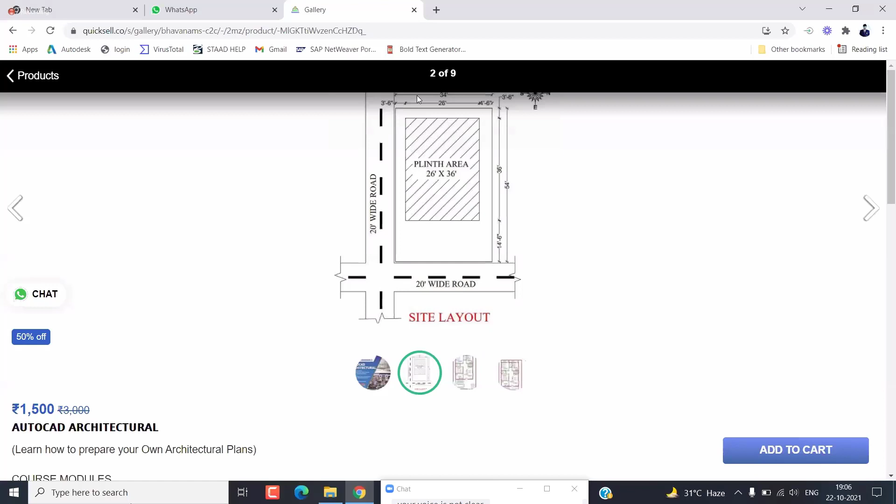And if you go here, this is how we can draw the master bedroom, and children's bedroom, kitchen, and where we need to place the living room. These are all things you need to learn as per Vastu.

So AutoCAD is not just a tool. If you know the concept clearly, like where you need to provide the bedroom and where you need to provide the children's bedroom, then you can convert whatever plans are in your mind into the software for better preparation. That is the main use of AutoCAD software. So learn AutoCAD and learn some of the government rules and regulations and everything.

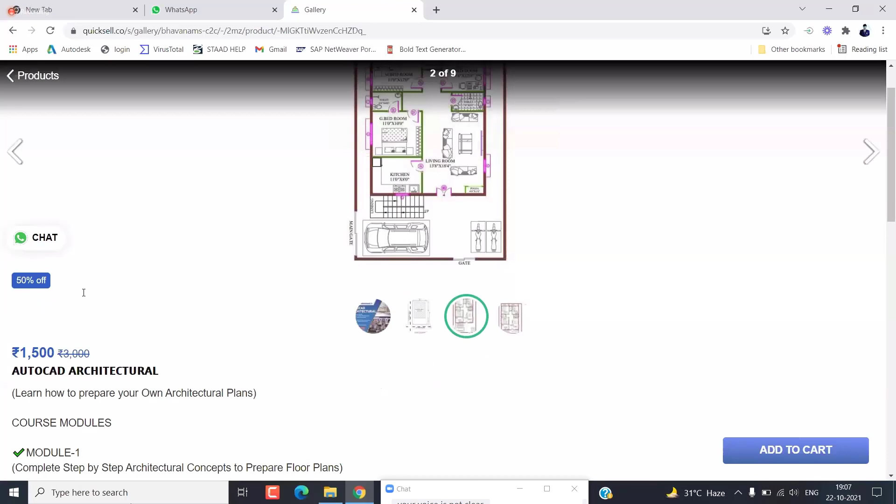This course has two modules. In module 1, you will learn about architectural concepts to prepare the floor plan, how we can prepare the floor plan. Your parents or uncle will give you directly a plan with one side dimensions, but they don't know how much we are aware of this, giving this answer and everything.

Still breaking, guys? Anusha, is it breaking still? It's a bit, sir. Hello? Hello? Anusha, please check it, is it clear? Still breaking, sir. Something is going on from my side, so it's not good actually. Anyway, I hope it is visible. Let me conclude it within a few minutes.

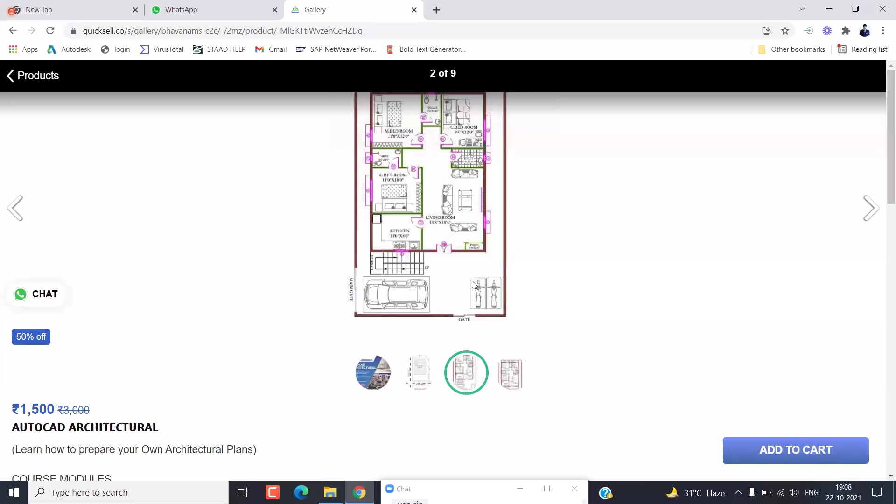So anyway, this is the architectural plan. And come here, this is SketchUp. If you want to learn SketchUp, like if you want to design interior drawings and elevation drawings, or otherwise walkthroughs and how we need to present, you can use SketchUp and V-Ray for those things.

This is done by Spandana ma'am. She's an MArch in Sustainable Architecture from GITAM, and she is working as an architectural planning and interior designer.

Okay, and come here, this is 3ds Max. This 3ds Max course is also the same like SketchUp and Revit. 3ds Max is the same software we will use. This is presented by Rutuja Obele ma'am. She's from Pune, and she is also working as architectural planning and designer.

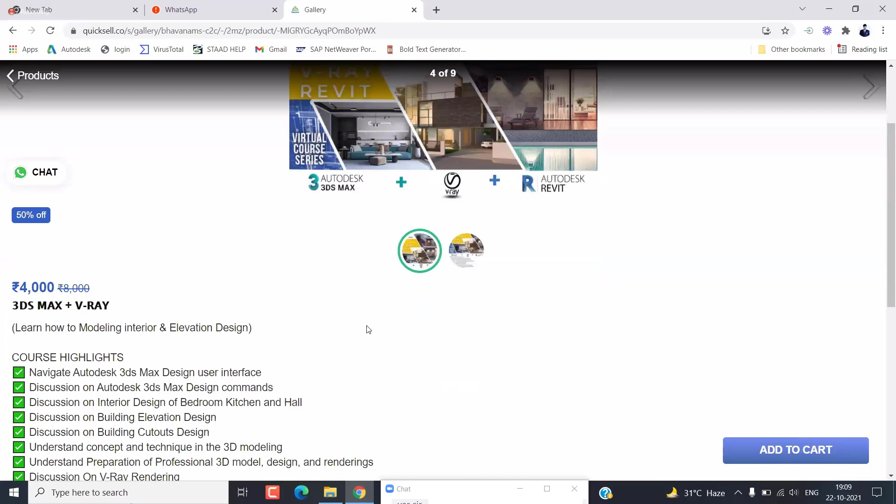And come to our ETABS analysis and design course. Here we have 3 modules, and the duration is 40 hours. This is done by B. Srinivas Reddy, BTech in Civil Engineering, and he is working as a structural engineer in an MNC company.

Next is the structural dynamics course. You'll need structural dynamics whenever designing buildings like G plus 15 or G plus 20 story buildings. This course was presented by Mahesh Surla sir. He did his MTech at Roorkee, and he's an IIT gold medalist from IIT Roorkee. Right now he's working at L&T company as a PGET.

Coming to our combo course, here is the Geotechnical Theory to Practice course, presented by Dr. Mainak Mazbudur sir. He is a research engineering manager, and he has a PhD in geotechnical engineering. He is also an IIT gold medalist from IIT Kanpur.

Another course we are going to start next month is Bridge Design using Midas. Do you know the Hyderabad Durgam Cheruvu Bridge? That is a cable bridge. That type of bridge design classes will start next month onwards. This will be presented by Mr. Vikram Singh sir. He specializes in bridge design and is an MTech in Structural Engineering from IIT Kanpur. He qualified the Engineering Services Examination prelims in 2019 and is an AIR GATE ranker.

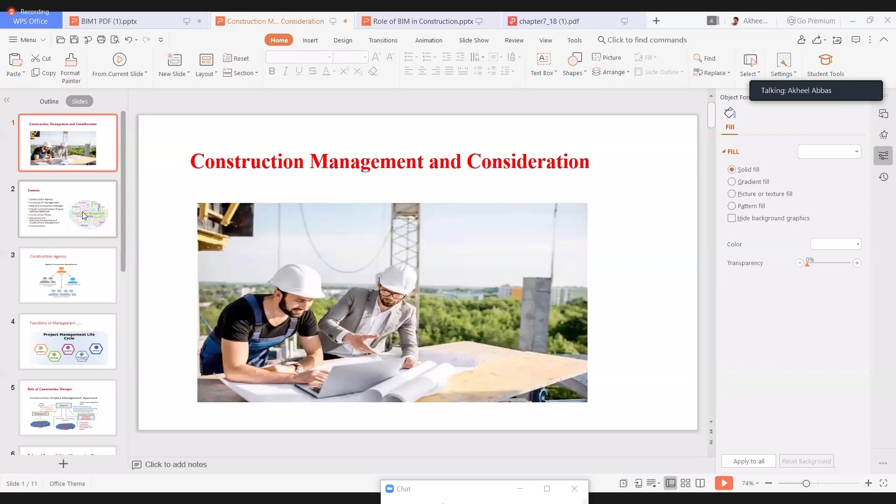What I'm gonna say, from the basic part, I'll explain about construction. Generally, what happens - the owner will have some requirement. For example, the owner will have a requirement like, I need to design one residential building. I don't know how, but I want a residential building in so-and-so time, so-and-so cost, and so-and-so material.

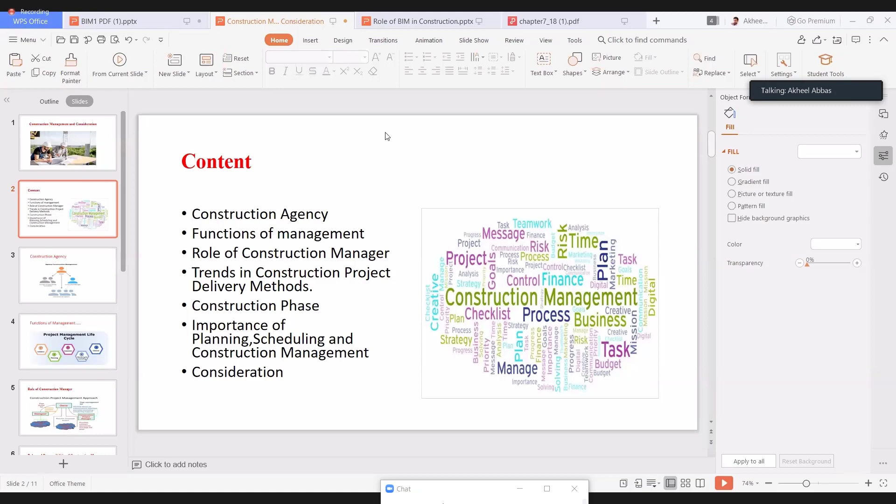Now I'm gonna share with you - these are the contents which I have prepared for a construction management role. The owner will consult with the architect as well as the contractor - these are the two people who will start the work. Generally, architects have the major role in the construction.

Architects are like the heart of the construction field, because they do the design, they do the brainstorming, everything, and they provide excellent work because they play a vital role in the construction field. Construction agency functions of management, then role of construction manager, trends in the construction project - these are the contents, I'll show you in the next slide.

Okay, construction - I have explained this one. In construction management, first, what will the owner do? They will hire architect and engineering consultants - like architects, then structural engineer, mechanical engineer, firefighter, meaning firefighter designer as well as sprinkler system engineer. Based on the project, there will be a lot of people like detail engineer, quantity surveyor - a lot of people will be involved in this. I'll take some.

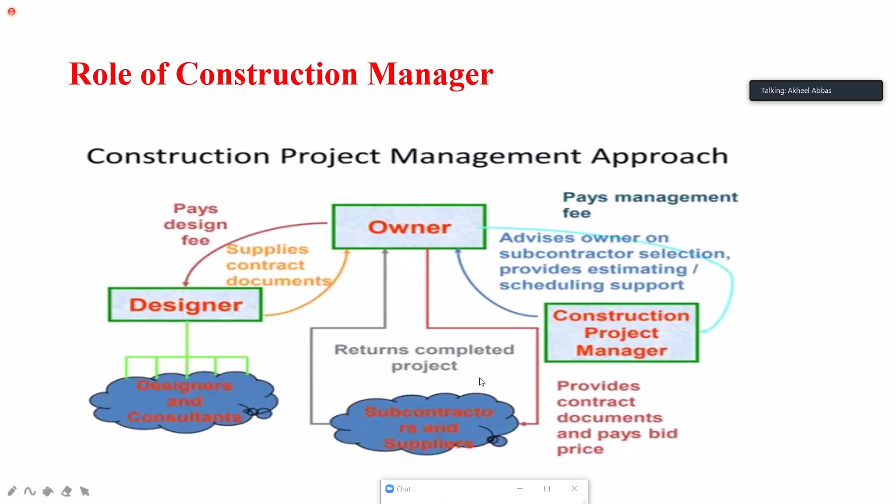Now, coming to the roles and responsibilities of the construction manager, there are 3 parts of managers who hold the work. The program manager is totally part of the design team. The construction manager will be in the field. The project manager will be both in the design team and on site.

The program manager is mostly in the headquarters with the design team. After completing the project design, he makes a budget and schedule, and provides leadership to the design team to complete the project. He is also an advocate for the owner.

In the case of the construction manager, he is the leader of all the work and plays a vital role. There are a lot of opportunities in India right now, it's like a boom. After this boom, construction managers will play a vital role in the next 2 years, especially between 2021 to 2023, where we'll find more demand for construction managers.

So especially for students studying in 3rd and 4th year of engineering, as well as architects, you should know the construction project delivery methods and understand the work the design team will do. This 21st century era is not that tough, it makes things easier, but you should still have solid knowledge in the field.

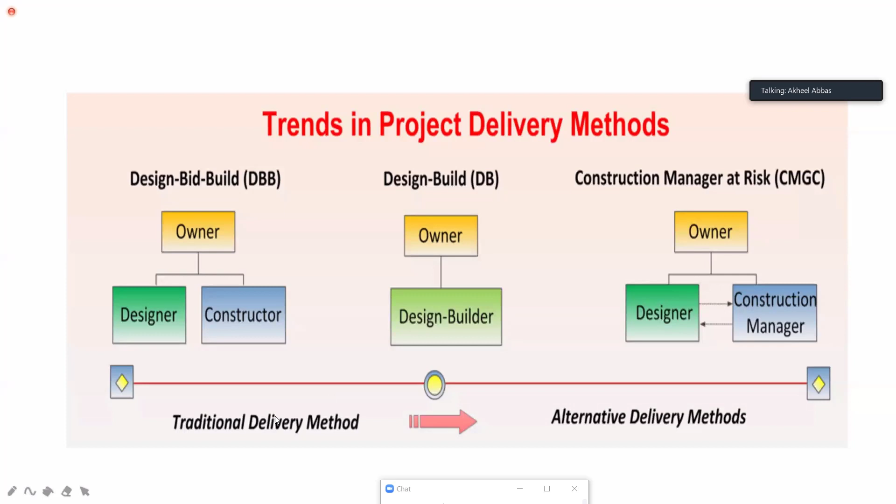Design bid build is a traditional method, new alternative delivery method, and the newer project method that has come is integrated project delivery. It's not common in India yet. Only L&T and big companies in India, like Cisco and other construction companies, are providing design build.

This is how the process takes place: the owner consults with the architect and general contractor. The architect hires consultants and engineers, like structural engineer, mechanical engineer, HVAC designer, firefighter, and sprinkler designer. I'm giving you a brief overview of how construction takes place.

Then this is the construction phase. What happens is the first initiation phase, like project constraints and problem statement. The client generally explains what he wants, like he wants the whole world in one building. He will explain this.

But based on the requirement, as well as the laws and contract given by the government, the construction manager designs and creates up to the limit of the client's requirement and satisfaction. He will design as per it.

Then the construction manager starts the planning phase: detailed planning, designing, modeling, management, scheduling, cost management, risk management, and all of that. I hope if you attended the previous webinar, Priyanka ma'am explained briefly about risk management, money management, total quality management, and all this. If you want, I can explain, but there's a shortage of time.

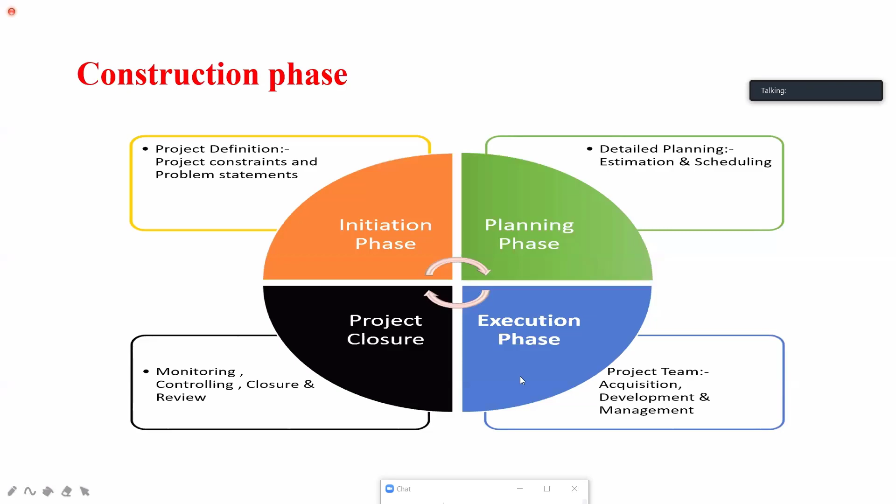He plays a big part in the construction field. The architect is the heart of the construction field. He is like the total man completing the work. Considering the importance of planning, scheduling and construction managing, I've given just an overview of planning and scheduling.

Why I mentioned this is just brief notes about why Navisworks is used a lot in construction management, like risk, and all the stuff which I'm going to share. Navisworks is used for planning, scheduling, and construction management, which is helpful across the board. Navisworks is not just about clash detection; it will provide you a sustainable building.

After completing the building, the facility manager uses Navisworks if there's some problem, let's say in a pipe. What the facility manager will do is consult with the plumber or mechanical engineer who designed the plumbing work. He will share this work in Navisworks, showing that a certain pipe has a defect in this particular building, and ask them to check it out and rectify it.

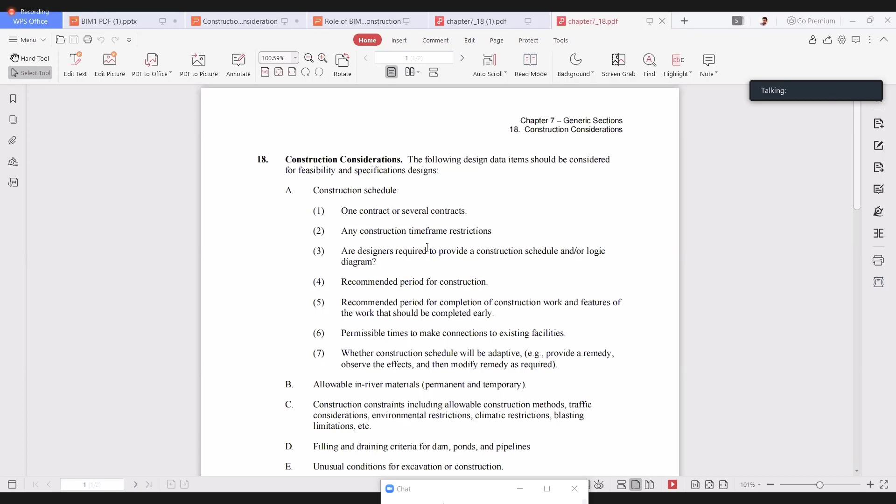Any construction time frame restrictions, like the work should be completed within a certain period. Are the designers required to provide a construction schedule? Designers can provide a schedule using Primavera, MSP projects, or Navisworks. You can schedule the project work in Navisworks as well.

I don't know why people mainly use Primavera and MSP, because engineers say these can provide scheduling and time management. But it's not like that, Navisworks also can provide 3D design and modeling. By tomorrow, I can show you how the 3D work takes place and the time frame that can be provided there.

Recommended period for completion of construction work and features of the work. The time provided should be completed accordingly. The owner will always ask why this work has not been completed in the particular time.

Miss Satya, do you have any problem? No, sir. Okay, no problem.

Recommended period, like the owner won't bear delays. For example, if he provided work from October 22nd to December 22nd, you should complete the work. The owner won't accept excuses.

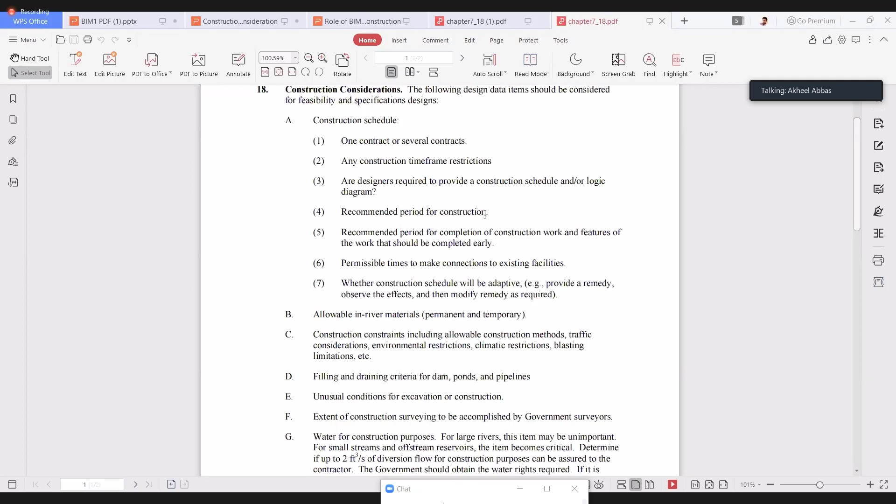I'm giving this example just as a hint. These are all kinds of frameworks. Before starting the work, please study these frameworks, because if it's in your mind, when any problems take place, you can say: sir, I have gone through all this work and taken a contract signature from you as well as from the government, so I don't have any problem with you. Just contact the owner, because my work will get delayed and I have to explain everything to the owner, so directly contact the owner and please don't stop the work.

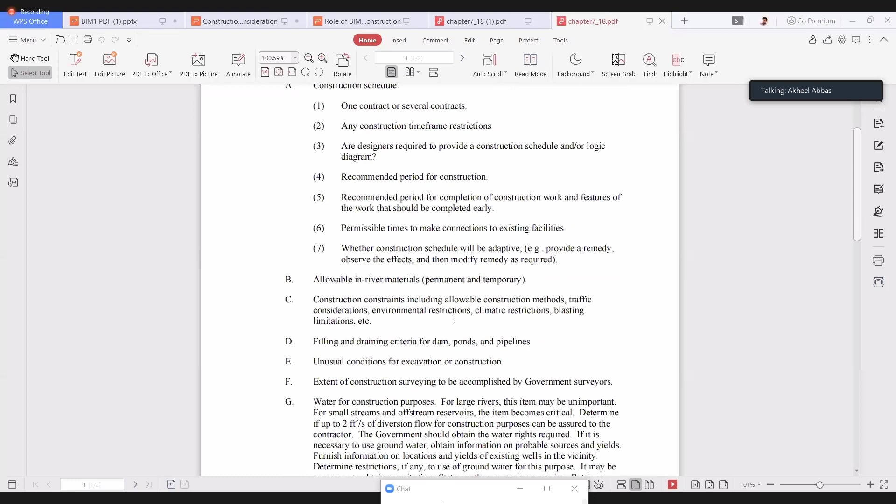You can tell them these are the frameworks you're going to explain to them. If you want, I can explain more about it. Just a second, I have noted some points here, so it will be helpful for you.

Is my screen audible? PPT visible? Sorry, I said audible.

Construction consideration: contract between owner and design consultants. Government approvals are a must. First check that the surveyor has completed all the work, then government approval should be there, with all laws and regulations followed during construction.

First check what happened in Vellore, the site which I visited, where they had not marked the boundary walls. The site person with his own land lot came and asked why I was constructing there, saying this is my boundary point, and started shouting. So please consider the boundary walls, take 1 feet inside your site so that you are in a safe place. After completing the project, you can extend while constructing the boundary wall; we can take that on ourselves.

What I'm going to explain here is what is BIM, maturity levels of BIM, how BIM works, BIM dimension terminologies, benefits of BIM, tools of BIM, how BIM is used on site, benefits to owners, and benefits to architects and consultants. I'll explain briefly.

BIM is like a jackpot for AEC construction industry professionals who design, plan and construct a building. They will benefit a lot from BIM, because BIM is not a software, but a process. From start to end, it will help you complete the process with accurate time, money, and management. It will help you a lot.

Now the maturity levels of BIM. There are 4 levels in BIM. In 3 levels, BIM will take part; in 1, BIM won't take part. In level 0, there will be low collaboration. The architect will generally design and model the building, then hand it over to design consultants to design structural things like beams, columns, slabs, and footings. Architects generally use CAD design, SketchUp, 3ds Max, InfraWorks for highway engineering, ArchiCAD, and Civil 3D.

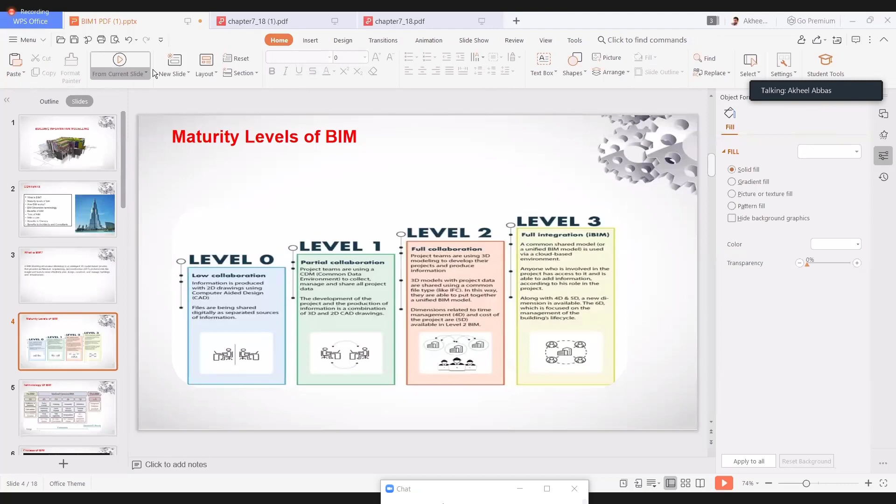Full integration means a common shared model, like iBIM, where they create one BIM model so they easily collaborate. For example, the project manager will go to Navisworks, take all the drawings from the architect, structural engineer, mechanical engineer, firefighter, as well as the quantity surveyor. He will collate that into one file, appending the models into one file, and he will detect the clashes in the building.

He will explain, for example, if clashes happen in the column—there are rules in the column and beam, like the duct should not pass through a beam or column. Why? Because it reduces the beam's life as well as the beam's load-taking capacity. So the duct should not pass over there.

The structural engineer will scold the mechanical engineer for providing the duct in the beam. So the mechanical engineer will provide a coupler or a T-joint to the duct and change its direction so that both the beam and the duct are safe. The same applies to the sprinkler system and ducts—the duct should not be provided in the sprinkler pipes, and the sprinkler pipes should not be provided in the ducts.

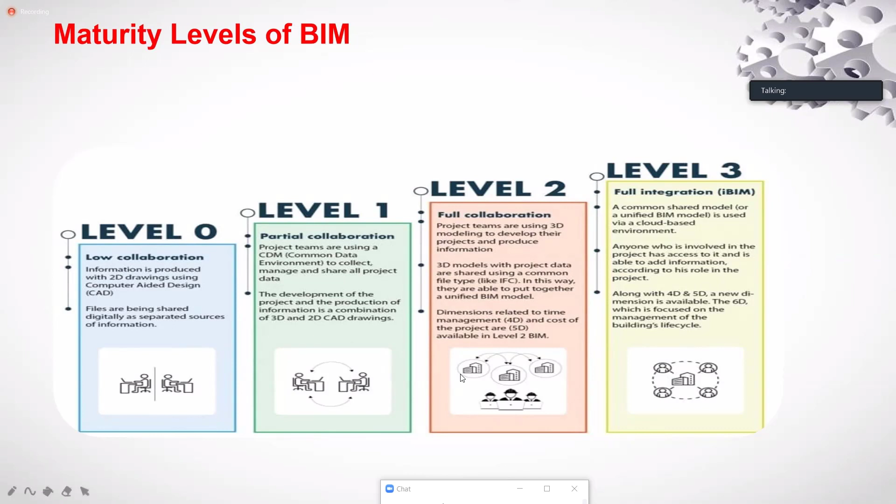In recent years, BIM started to work and grow, and it has become a trend in the United Kingdom.

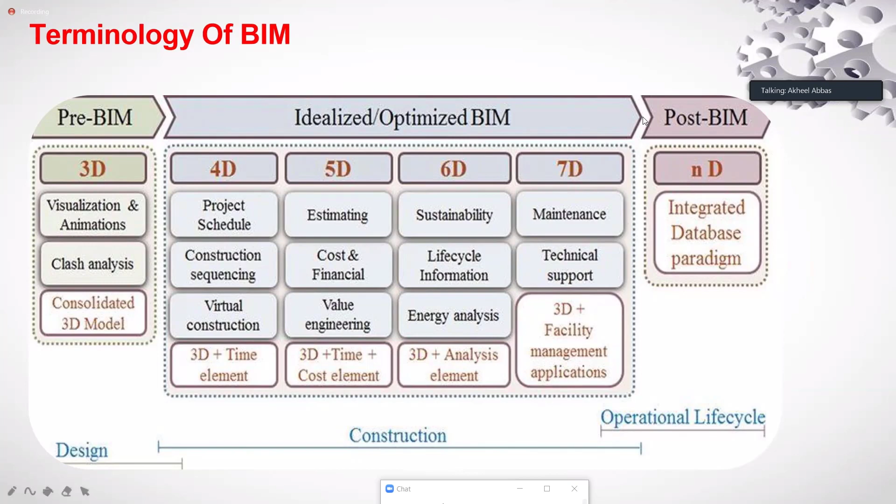Is the money okay? For example, the owner will provide only 1 crore for this particular building, meaning all kinds of material and labor productivity everything should come within that particular 1 crore. The BIM manager and BIM coordinator will design and manage it in a proper way.

Documentation, fabrication work, construction, 4D, 5D - all this operation work, renovation. The BIM process is such that after completing the project, for example, if there is a problem in the building, like reinforcement has some damage and dampness has come due to improper damp proofing material not being provided in the toilet, the building contains some cracks.

So the facility manager will explain to the structural engineer, and he will provide some documents and details about that particular building. Then the facility manager will rectify and retrofit that particular place so it provides good performance and good life of the building.

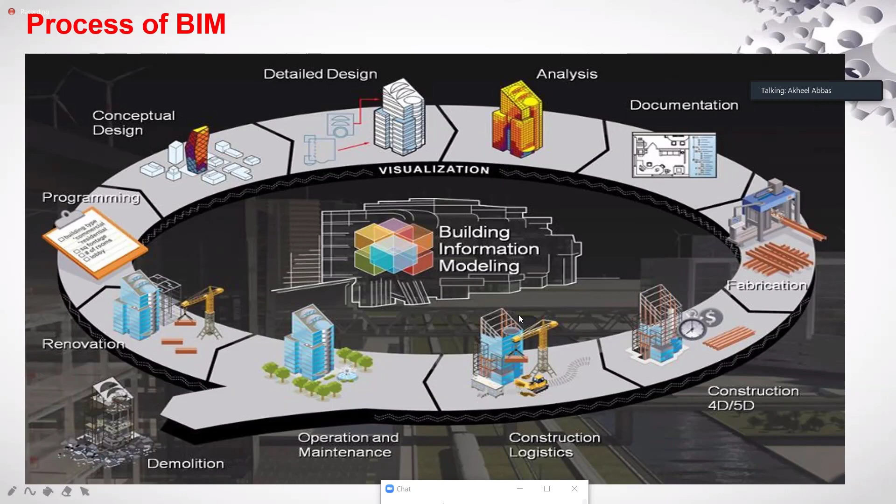For example, the architect will also do the work as well as mechanical will also do the work at the same time. It's like BIM is up-to-date work.

What happens in one day - if that particular architect has completed one floor, he will sync that file in AutoCAD or Revit or any other software which can sync over there, and he will post it into some platforms like Autodesk BIM 360 or Navisworks. He will sync the document.

The project manager will check all the work which the architect has completed in this particular time, this particular day. He will check the details and check for clashes. If any clashes came, he will mail the particular architect that in so and so place your thing has a mistake and please rectify it.

The project manager will collaborate with the architect or other consultants. For example, if a mechanical engineer provided some ducts with mistakes, like spacing problems or dimension problems in the ducts, the project manager or BIM coordinator will check over there, and explain to the mechanical engineer to check and rectify it and resend the file, so they can complete the work as per the particular schedule time.

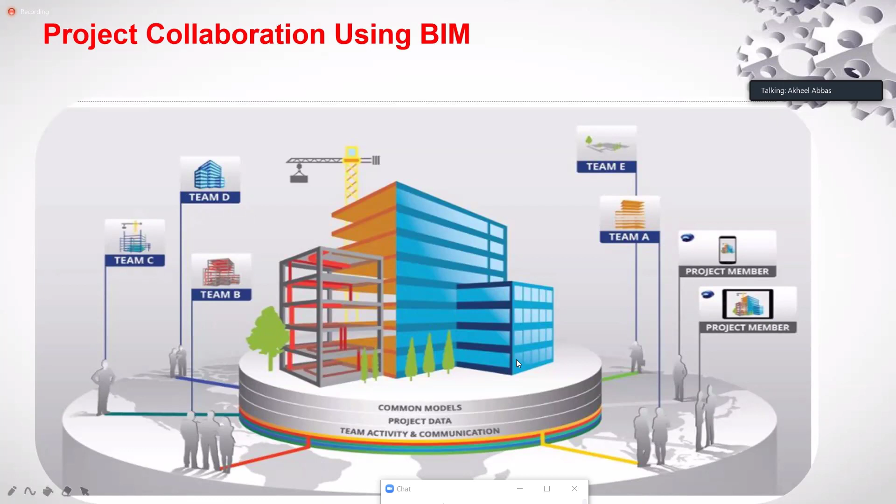Involvement of stakeholders is like this - before the design build takes place, it's total confusion. First the architect will come, after the architect then mechanical engineer, structural engineer, then facility manager will come. If some problem comes, it goes back to the architect, and if there's still a problem, demolition takes place.

For example, I'll explain in Telugu.

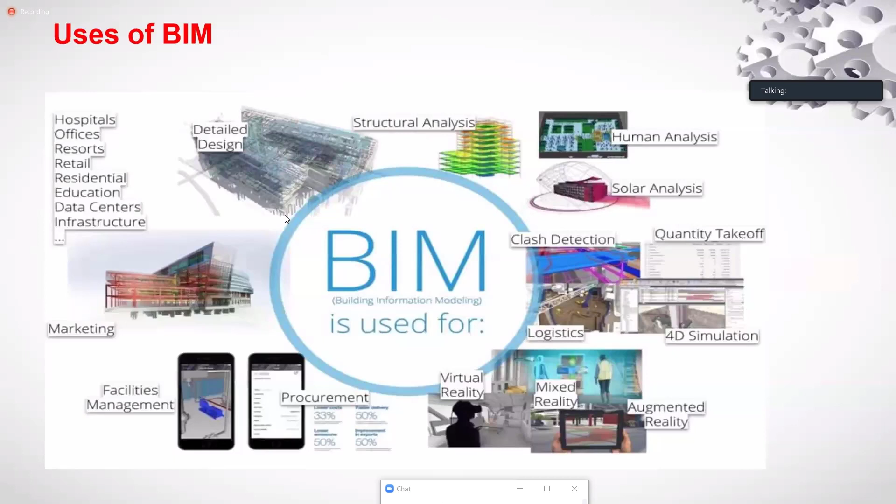These documentation can be seen by using Bluebeam software, like all kinds of plan drawings over there in one particular tab, which is used by the construction manager. All kinds of plans, AutoCAD 3D plans, like scheduling, timing, as well as material management, all kinds of work handed over to the construction manager, used for construction by using Bluebeam software.

Benefits for stakeholders: a lot of documentation errors and omissions take place without using BIM. If you use it, it will decrease, like 61% reduction of document errors takes place.

Rework won't be there - 30% you can avoid rework if you use BIM. All kinds of project duration, fewer client construction costs. It will reduce up to 30 to 65% of work, and rework will be reduced using BIM.

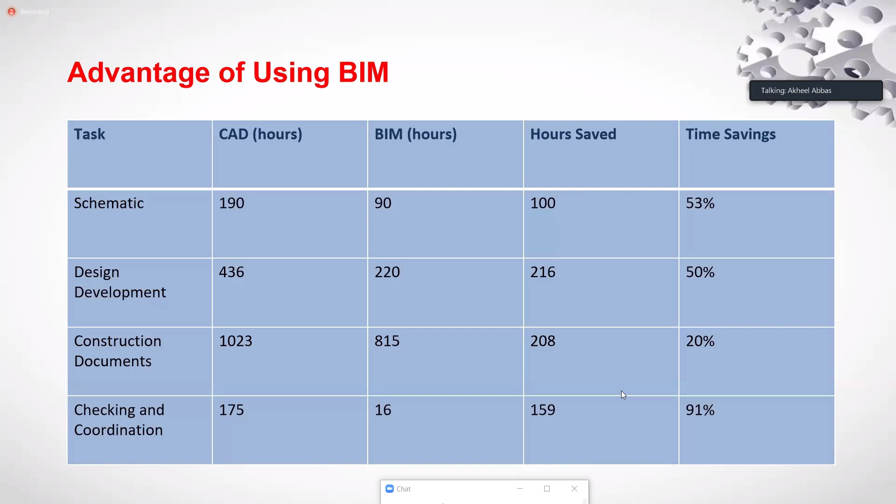Special benefits to landlords, like lower cost - 33% of your cost will reduce if you use BIM. Generally, if you are taking a 1 crore project, 1 crore 33 lakhs of project means 33%. It takes only 1 crore to complete all the project by using it.

Faster delivery, like 50% delay is reduced. Generally it takes 2 years for completion, but by using BIM, you can complete the project within a year. Lower emission, 50% of all kind of material and labor productivity can be also reduced.

And improvement in exports. For example, vendors will seek for the contact, like I need sand at this particular time, I want to deliver all these kind of materials at that particular time, so there should not be any disturbance in my construction workflow.

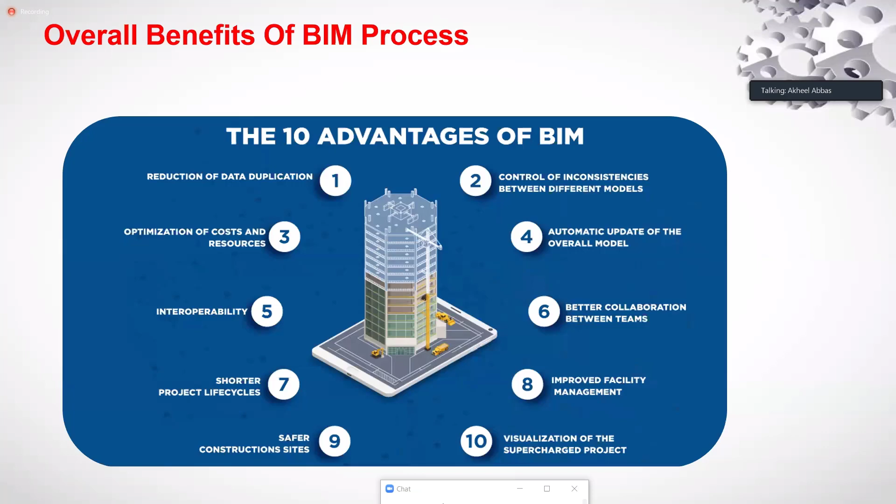In conclusion, it's clear that BIM represents the opening of the construction industry's interoperability. There is no doubt that it's a demanding way in the future. Almost 49 to 50% of Indian construction industries has opted for BIM because of the enormous amount of feedback getting from the customers. They are seeing it and mentioning it, like by using BIM you can get all kinds of work done very easily as well as in an eco-friendly manner.

Last but not least, I can say this technology portends to provide enormous amounts of positive results and sustainable work completion. What the owner will think is: we want all the work to be completed in the particular cost, in the particular material, as well as in the particular time. All three of these will be done by using BIM. I can assure you that using BIM provides all kind of stuff which is very required in the construction by using the recent techniques like laser technologies and digital twin. Data management - all kinds of things should take place in this.